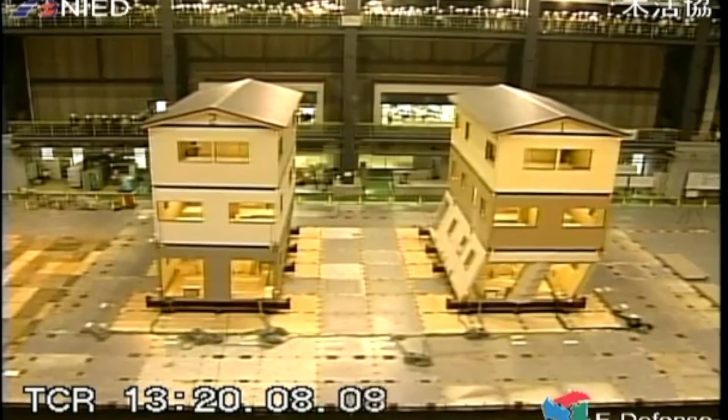So you can see from the video what happens in a soft story condition. The building with the soft story condition had a total collapse and it actually rolled over. The building that was retrofitted survived.

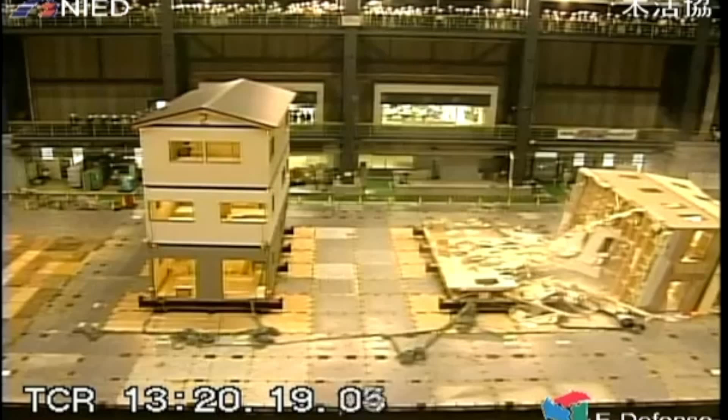The cities that have critical seismic zones, which includes Los Angeles, San Francisco, Oakland, and Sacramento, recognized this as a risk and collaborated together to develop the soft story ordinance. They embarked on creating a seismic rating system and an ordinance requiring building owners with this potential risk of collapse to retrofit their buildings.

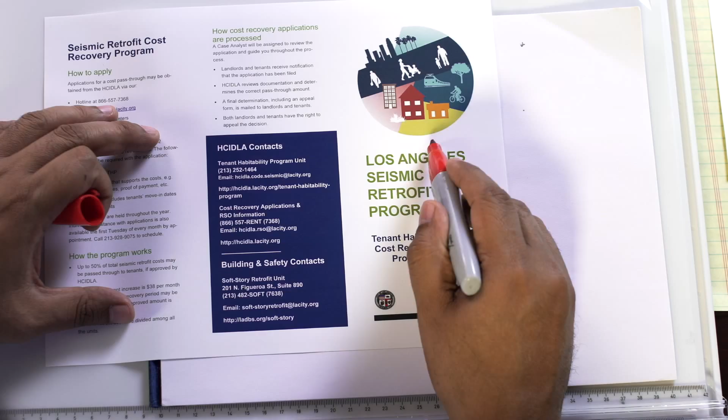It's a safety measure. The City of LA created this safety measure, called the LA Seismic Retrofit Program, the Los Angeles Seismic Retrofit Program. This handout, which is available, you'll see the link up on the screen, gives you the basic parameters and also informs tenants in buildings like this.

With over 15,000 buildings affected, it's a fairly drastic ordinance. The timeline for implementing the ordinance is approximately 7 years. Let's go over the timeline.

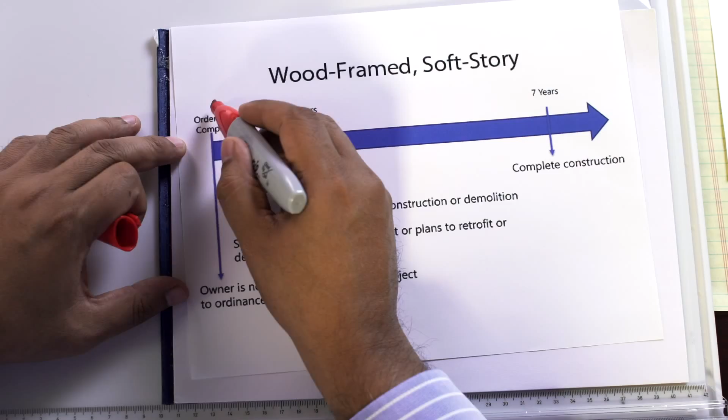The building owner has, from the date of the order to comply, which is when they get the notice, 7 years to comply with the ordinance. In the first 2 years, they have to submit proof that they have hired an engineer and that they're in the process of retrofitting their building.

The city's quite serious about this. The city will issue the order to comply, and building owners that don't comply will be subject to penalties. So it's a mandatory ordinance, and the tenants will be made aware. The order to comply will be issued, and it will affect the title of the property. So as a building owner, you've got to comply.

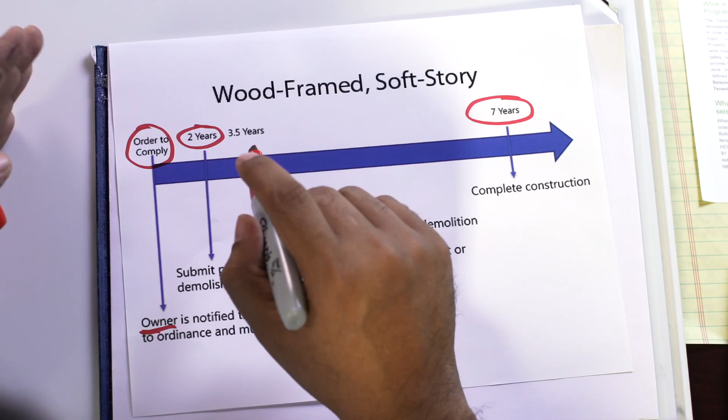The first thing we want to do is identify all the buildings that are at the greatest risk. This step, step number 1, is being done by the City of LA. I don't need to go into that with you. They are the ones going around identifying those buildings and then issuing orders to comply.

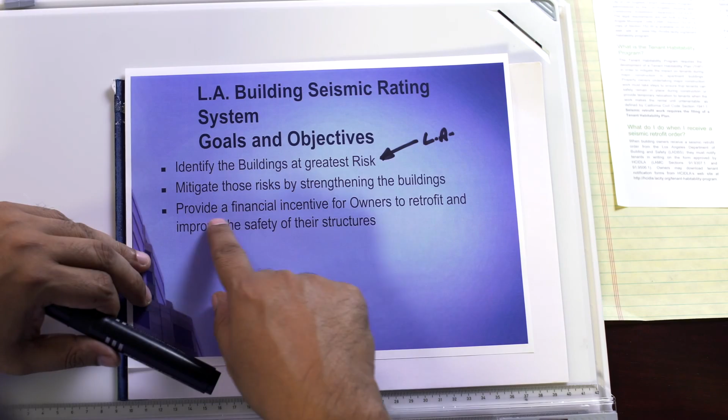When the owner gets the order, the owner then has to mitigate those risks by strengthening the buildings. The city is also trying to provide some financial incentives to building owners so they can help finance this or create tax benefits. That, again, is a separate topic, outside the scope of this presentation, but there are some financial incentives out there.

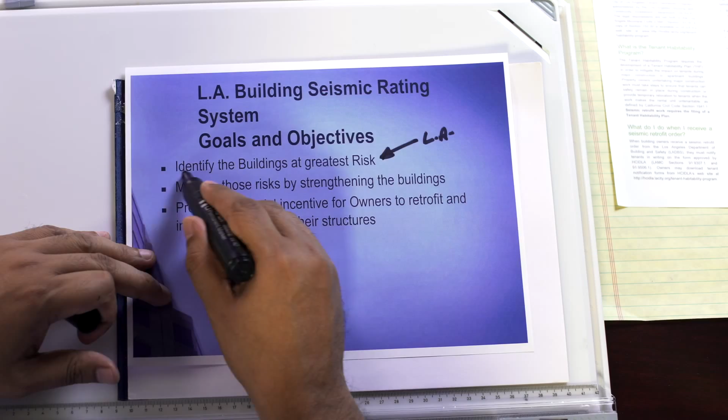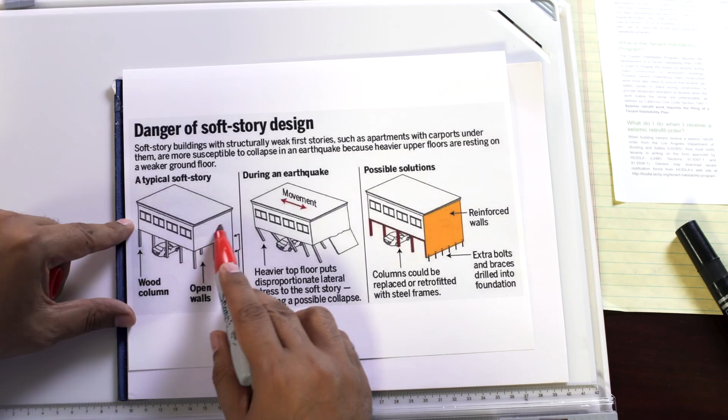On the left hand side, you can see the building which has a pretty robust second story with these weak columns. This is very, very common in Hollywood and Santa Monica. I'm sure many of you are living in these buildings. When you see this type of framework, that is potentially a soft story and a collapse hazard.

In a fairly moderate earthquake, that entire building will collapse. You can see that illustrated in the second portion of the figure, which shows that under lateral movement, that entire floor will come down. And obviously, if you have 2 or 3 or more stories up there, and we are, being Los Angeles, very densely populated, the risk is even higher.

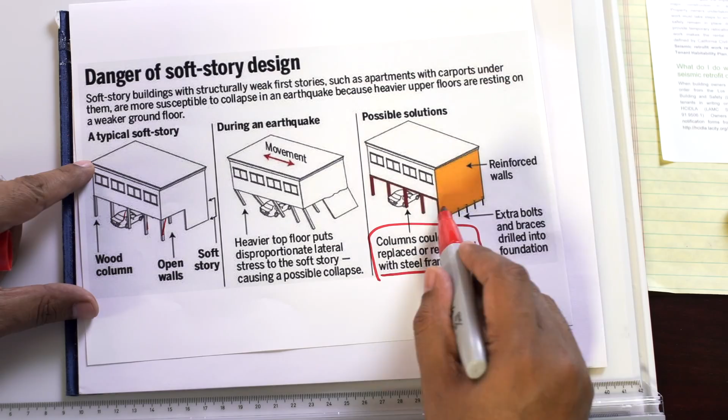So what do we do? Well, the solution focuses on using strengthened columns, either steel columns, moment frames, or possibly shear walls, to strengthen that lower floor so that it does not have a weak stiffness line, so that it doesn't collapse. So what we're doing is taking these existing columns and either replacing them or upgrading them. So I drew this sketch for you before.

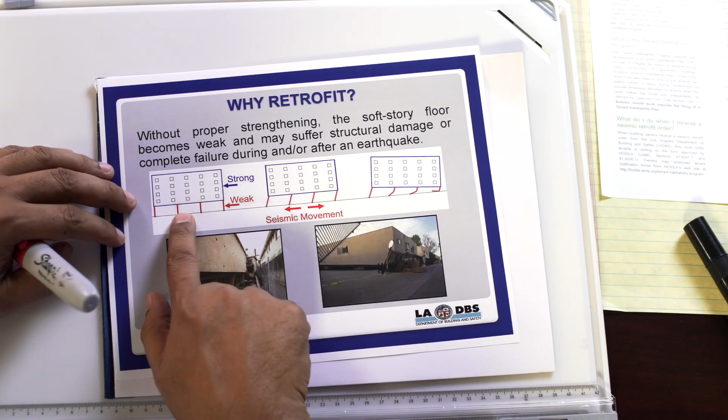We have to strengthen the weak column line. So what we're going to do is come in with our solutions. Here are the options: one option is retrofit options.

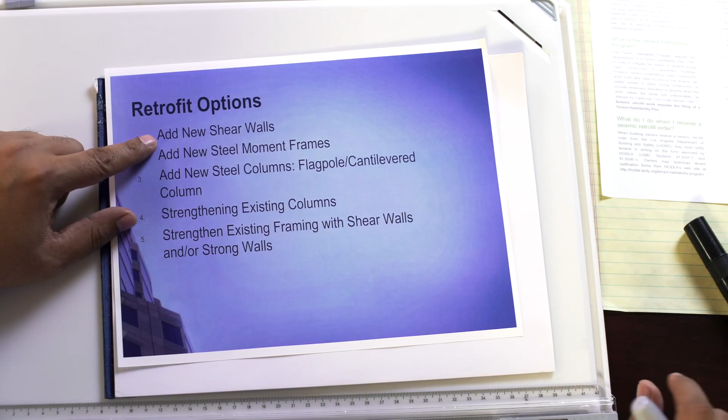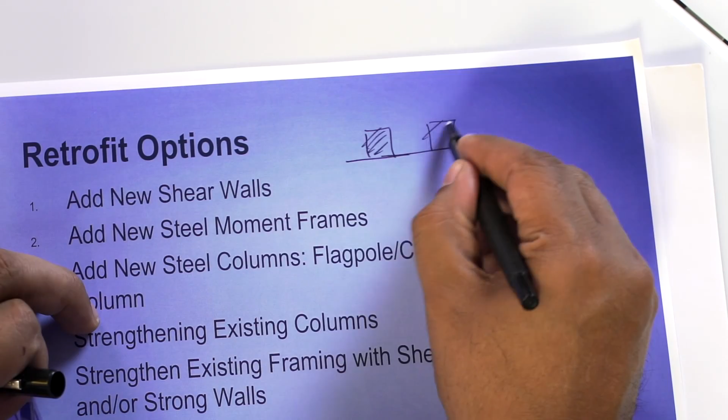We can add new shear walls. I'll explain what that is. A shear wall is essentially a wall that comes in to supplement the stiffness on the ground floor, and you have your upper floors up here, and that creates a higher stiffness. It's basically strengthening using a wall.

Another idea is to use a steel moment frame, and we'll talk about that in a second. We can also add new steel columns, which we call flagpole or cantilevered columns. I'll go into that in a minute.

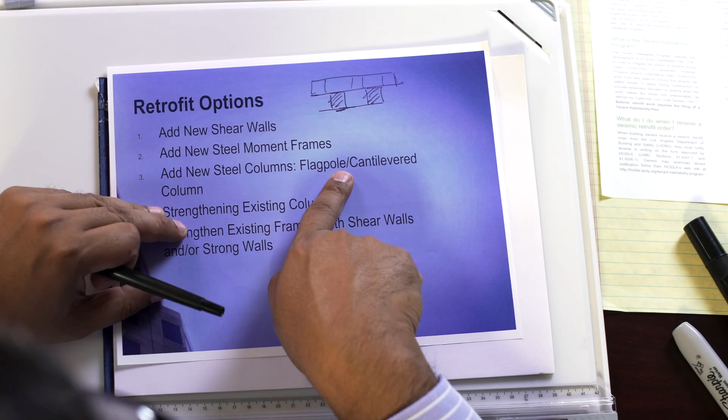We can also strengthen the existing columns. If it's already steel, maybe we don't need to replace the existing steel, maybe we can strengthen it, maybe box it up and create a tube. I'll explain that also. We can strengthen the existing framing with shear walls and or strong walls.

So here you have 5 options, and it depends upon your structure, it depends upon what the logistics are, it depends on how many floors there are. The first step is to examine the structure, do a feasibility study, and try to see which one of these is the most cost effective.

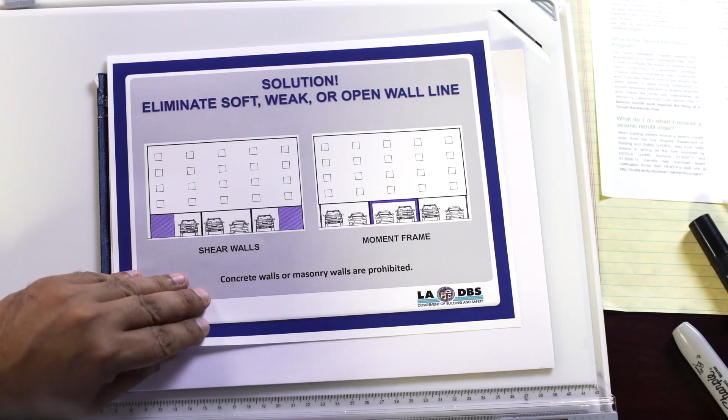For example, let's look at a hypothetical case: 1, 2, 3, 4 stories over my soft story. In this example, two solutions: one is to put in 2 shear walls, and the other is to put in a single moment frame. Now, what's the problem with the first one?

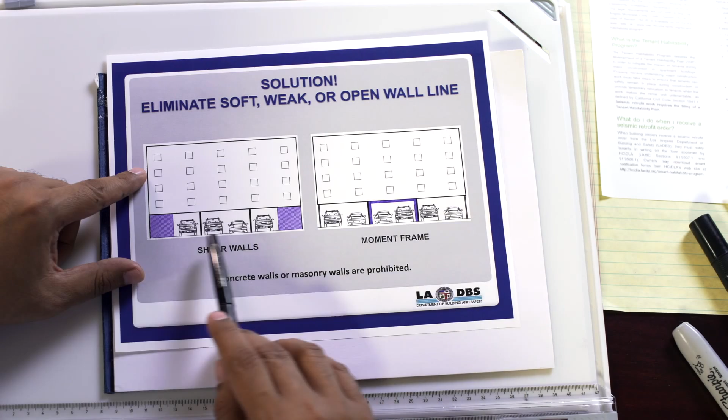The first one is most likely going to be cheaper, but the problem is, as you can see, you lose parking. That's the problem with shear walls—they take up the parking, and no tenant likes to lose their parking.

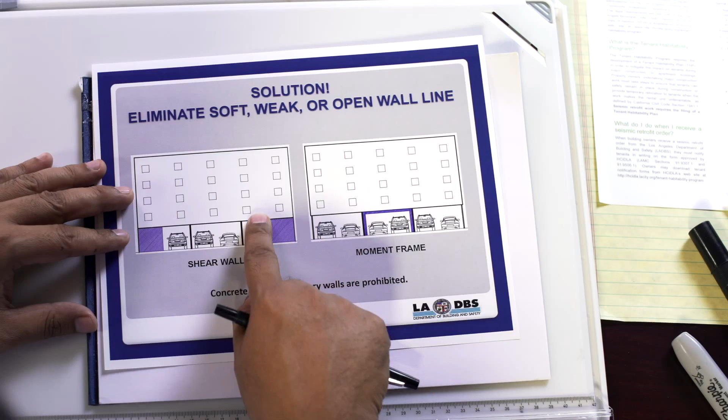The second option is a good option, but I want to go into the details of putting a moment frame in. It's a lot more involved than just what this drawing shows. A steel moment frame is a combination of columns and horizontal beams that are rigidly connected at the joints.

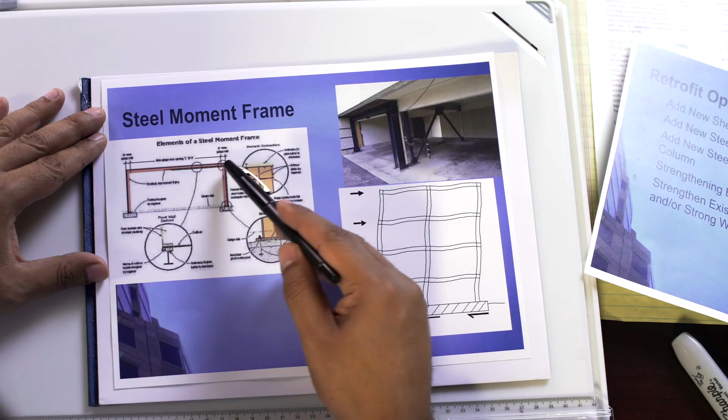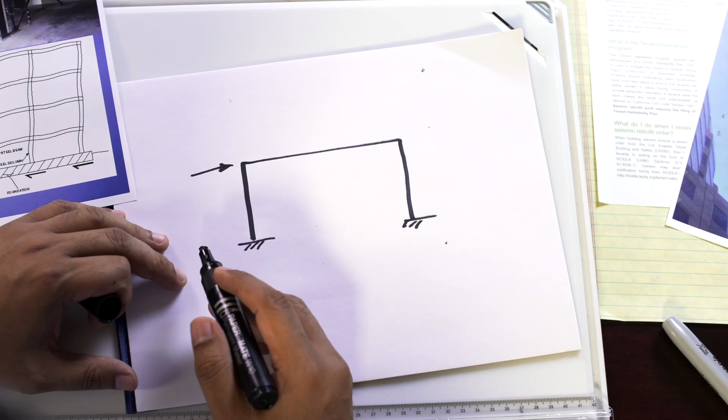What do we mean by rigidly connected? Let me try to explain that with a simple sketch. If I have a frame made of steel, and I apply a load on the side, if these are rigid connections, which they're supposed to be, and everything here is made out of steel, when this deflects, it's going to deflect like this.

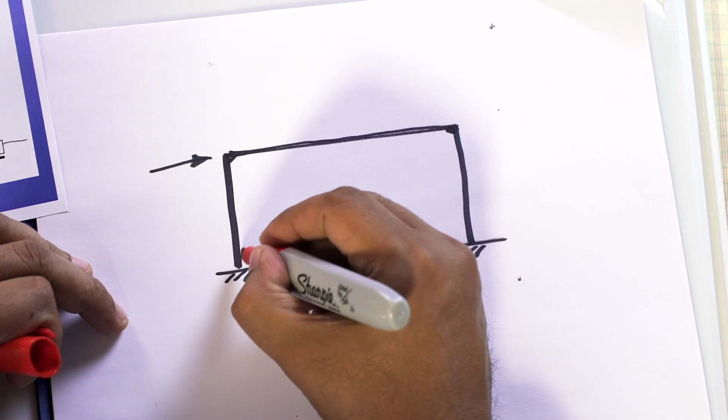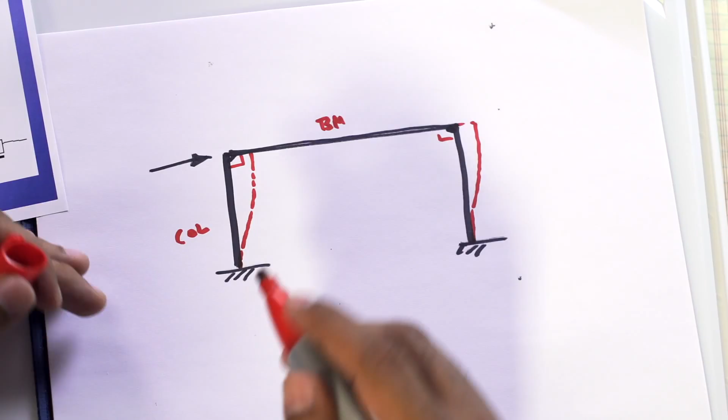It's going to deflect in a way that the angle between the column—here's my beam—that angle between the beam and the column always remains at 90 degrees. In other words, there is no rotation.

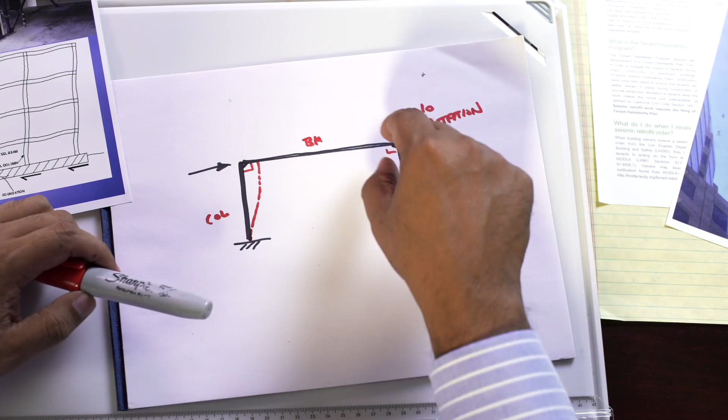The fact that there is no rotation means that there's a very high bending stress occurring on those beam-column joints. As opposed to a hinged connection, if we allow rotation, then what happens?

The frame would deflect like this. Then it's no longer a frame—well, it's still a frame, but it's pinned. If it's pinned, then it will deflect like this because this is allowed to rotate.

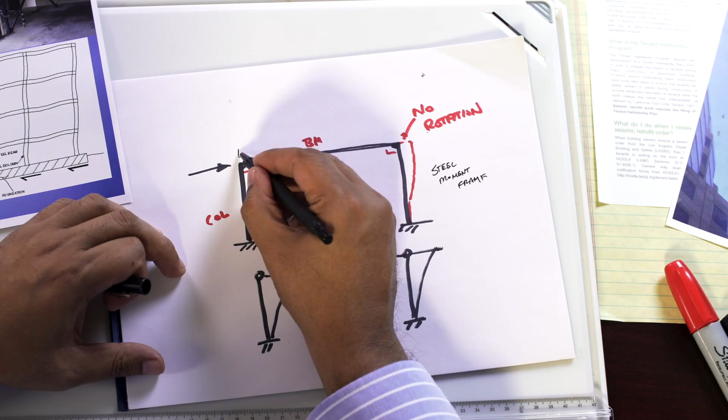What's the difference between the two? This one, which is a steel moment frame, will have a shorter deflection—it's much more stiff. This one, which does not have a moment frame, this is a cantilevered column, will have a higher deflection.

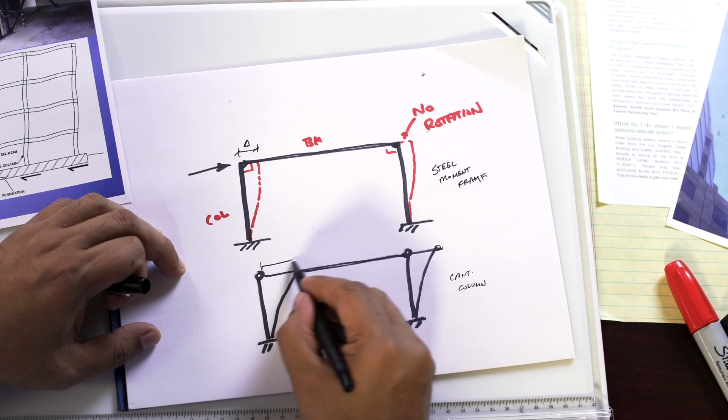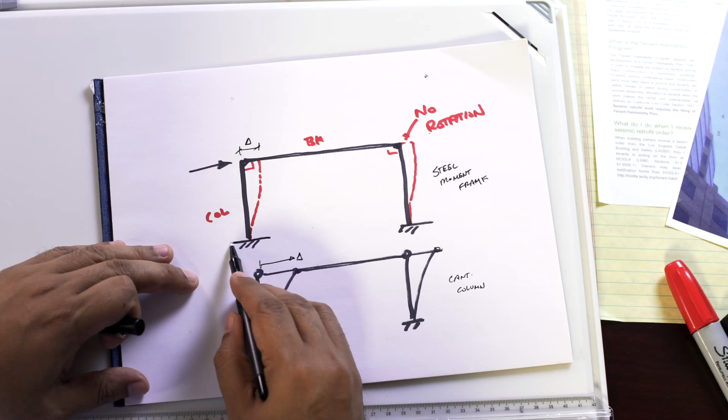So it all depends on whether or not the building can tolerate the higher deflections. What's the difference between the two? The steel moment frame requires a grade beam that has to be dug inside.

There's a whole concrete beam that has to go in there, and this connection is a very, very detailed connection. It requires welding, it requires bolting. It's more expensive, but it's the best solution, I will say that.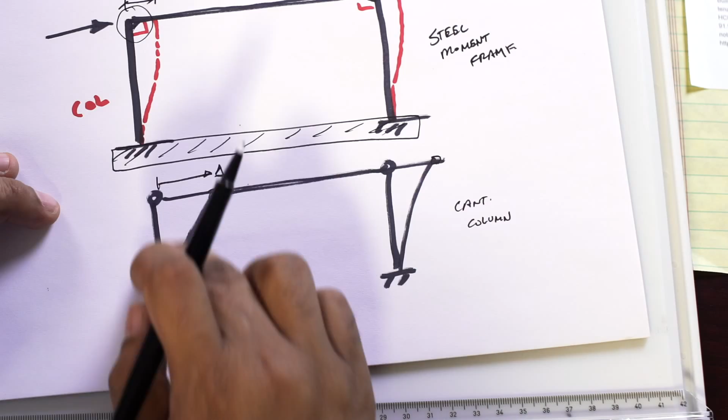From an engineering standpoint, you can't beat a steel moment frame, but it is also more expensive. The cantilevered column, shown on the bottom, can be designed with a footing. It's a cheaper solution, in my opinion, easier to install, but it has less stiffness.

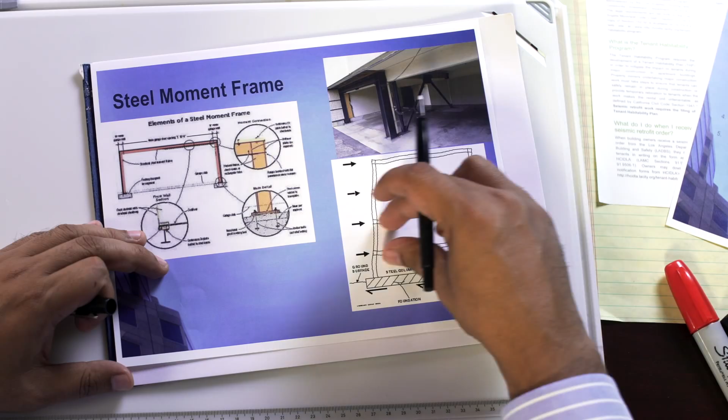Now, the question is, in terms of stiffness, you have to look at what do you need. If it's only a 1-story building, we may not need a steel moment frame. Maybe we can do a cantilevered column. What I like to use is what's called a structural tube.

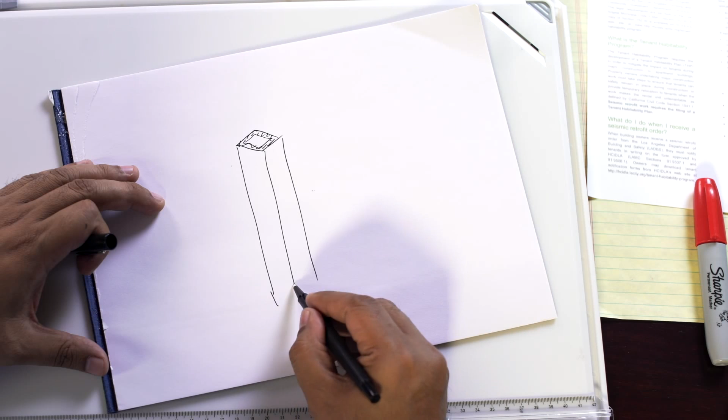A structural tube is exactly what it says: a steel tube which is then connected down at the base with a steel plate with bolts that go into a concrete foundation. Why do I like this solution?

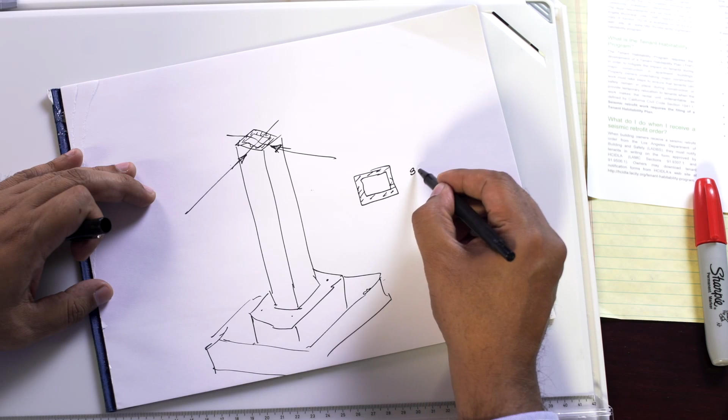Because the structural tube can take loads in both directions. It has symmetry, so when I do a design, and let's say I recommend an 8-inch by 8-inch by half-inch thick structural tube, I like that solution because I get strength in two directions.

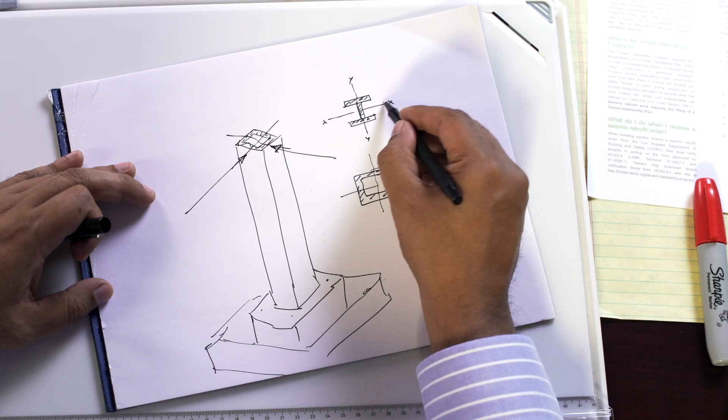As opposed to doing an I-beam, a lot of people use the I-beam. The I-beam is strong about one axis and weak about the other. In my little sketch here, it's very strong about one axis, the x-axis, but very weak about the y-axis. It does not give you the same strength in both directions.

So there are multiple options, and the same thing applies when we look at these other choices. Let's look at the wood shear wall.

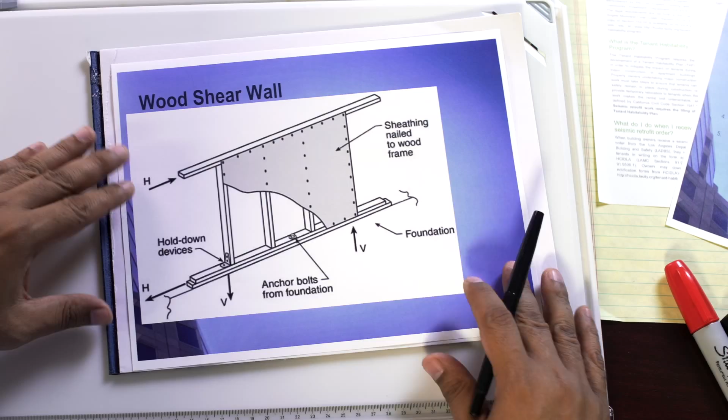A wood shear wall is essentially a system of studs with a top plate and a bottom plate with plywood sheathing. What does a wood shear wall do? When you put the plywood sheathing on and apply force, this sheathing, which sandwiches to the stud, prevents the shear wall from deflecting.

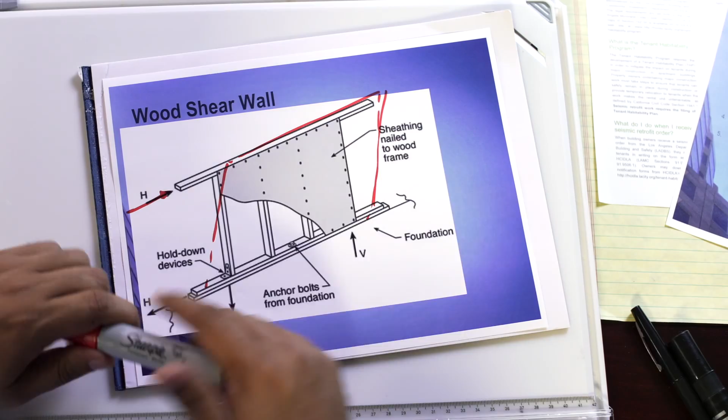It's as simple as that. If you didn't have the sheathing and just had the studs, the wall is less stable. You apply the load, the studs will just bend. But when you put the sheathing on, it ties it all together, creates a panel. And that's what a shear wall is.

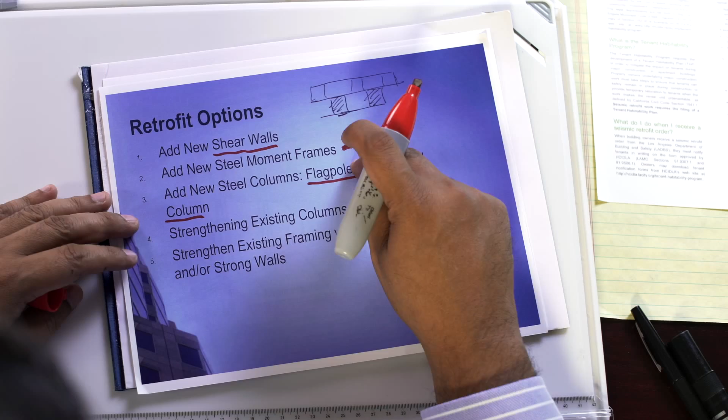What about the fourth option, strengthening existing columns? What do I mean by that? Let's talk about that for a minute. Let's say your building has some steel columns already in place. Usually those columns will be in the form of I-beams. They'll look like this.

So maybe when we look at your building, we find that the steel columns are already there, but they're not big enough. Well, we can come in and weld new plates on the side of that steel column. We can also weld a new plate on the stronger side, and box that in to create a new column, which is much stronger than the original column.

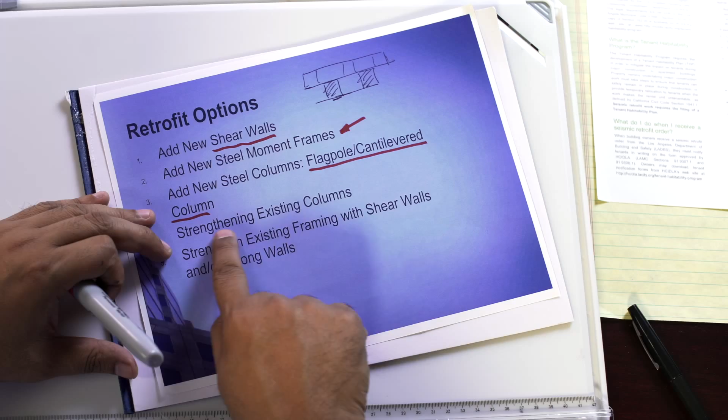So it's more than one option, and maybe strengthening the existing column works. Again, there's no one solution, there are multiple solutions. They apply to different cases, and the job of the engineer is to give you those choices and help you decide as an owner which one you can afford.

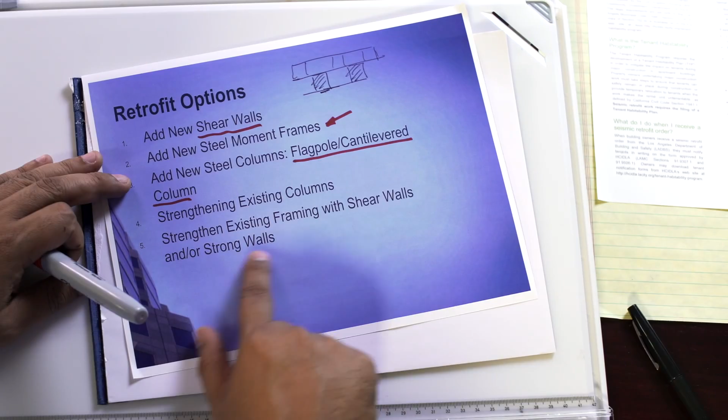The other option on the list is the strong wall. So we can also use adding a strong wall. What is a strong wall? A strong wall is essentially a shear wall, but it's a proprietary shear wall developed by a specific manufacturer, which has a super high strength and it's not as long.

In other words, this distance here can be as short as 2 feet. It can be as short as 18 inches. I think they even go down to 12 inches. So what does that mean? It means that if you have 12 inches to work with, you could possibly put in a strong wall.

But as you saw with some of the slides we looked at, 12 inches may sound like a lot. It's about a foot. You may not have a foot. In some cases, some of these columns are only 6 inches wide.

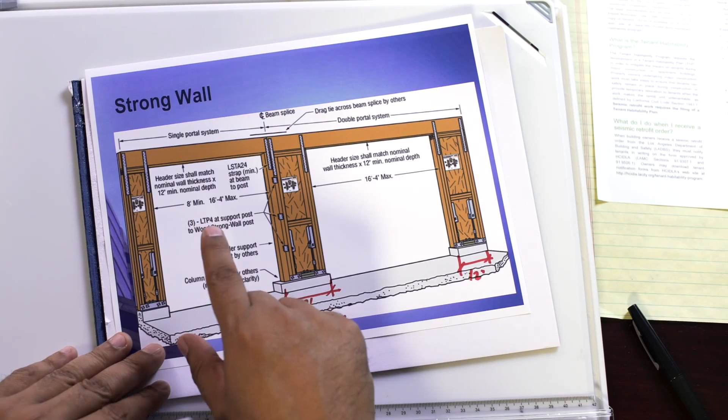If I put in a 1-foot strong wall, what have I done to my parking? I've lost my parking, and parking is a sensitive matter. So strong walls can be used in certain instances where if you have the length and you can do it, then by all means it should be considered.

But if you don't have the length, then you have to go with the steel moment frame or the cantilevered column. So here's the question I get all the time. Every owner comes to me and says, give me a price, how much does it cost? I get this question all the time.

And my answer is, it depends. I can't give you a cost. We first have to do some sort of analysis, a step one. I emphasize that because my role in this process is as an engineer. I'm not a contractor - I mean, I am a licensed contractor, but I don't practice construction. My job as an engineer is to evaluate the building and give you your best option.

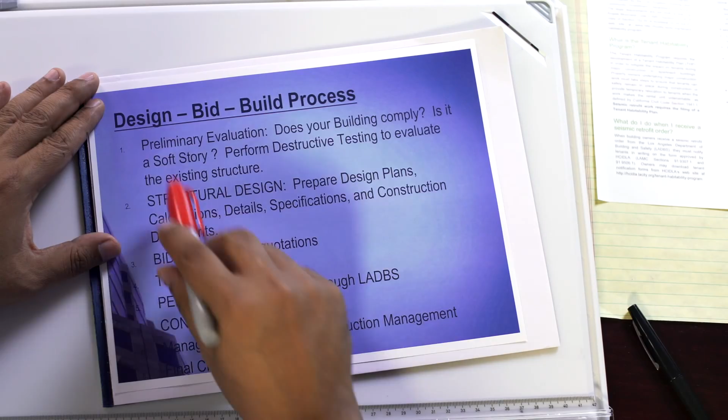Then you can go and get the contractor of your choice, or I can recommend somebody to you who can give you the price. There are two ways that you can proceed. The first way is what's called the Design-Bid-Build process. This is the traditional way. Step one, we do a preliminary evaluation.

Does your building comply? Maybe your building already complies. Just because they gave you the notice, it doesn't mean that you necessarily have to do something, because it just means they're letting you know that you need to examine your building. Is it a soft story? We have to do some destructive testing - come out to the building, cut some stucco, see whether the columns are steel or wood. So we have to do some evaluation unless we have a set of drawings.

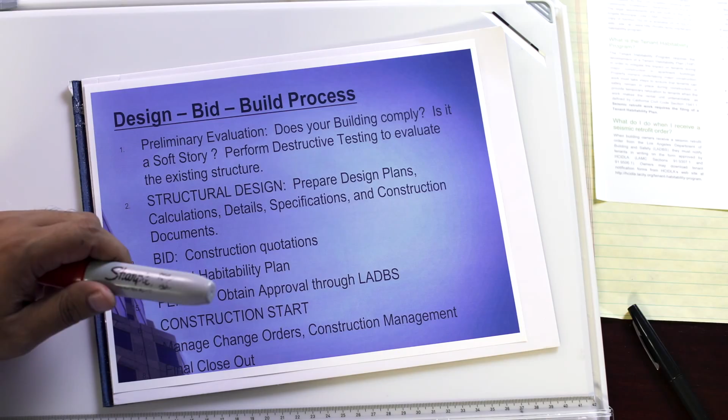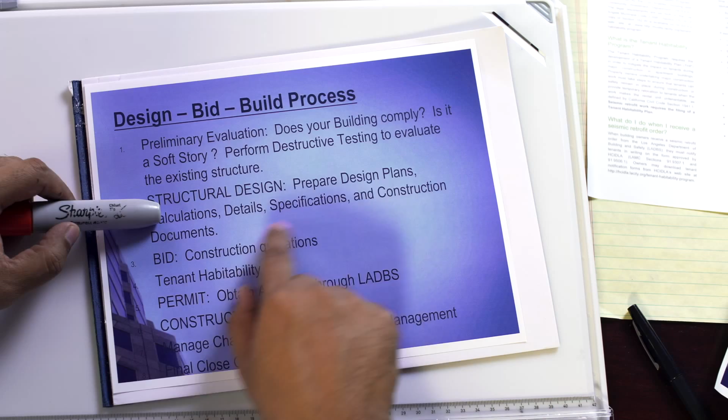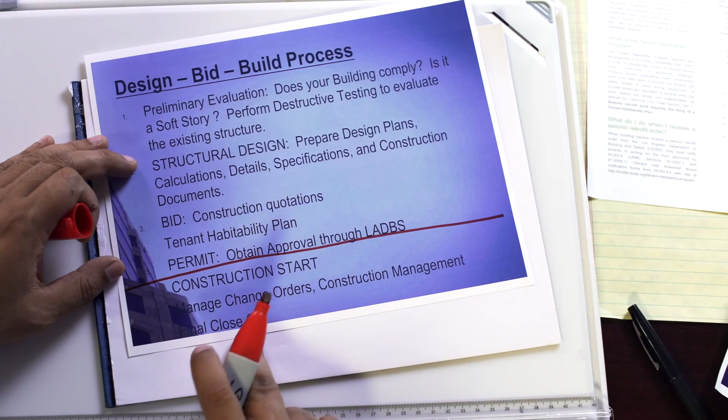Then we have to do some calculations. We have to see, going back to the 5 options, which one of the 5 options is going to work? Is there a 6th and a 7th option? So we have to do some engineering and evaluate. Then, after we do the evaluation, you can come up with a cost, and then you can develop your tenant habitability plan, pull your permit - which we will help you with. At this point is where you retain your contractor and start with steps 6, 7, and 8, which is to engage the contractor and let them go do what they do, which is to build it.

This is the preferable option - this is what I recommend, option number 1. Option number 2 is another choice. Some people don't want to take the steps of doing the evaluation, the structural design.

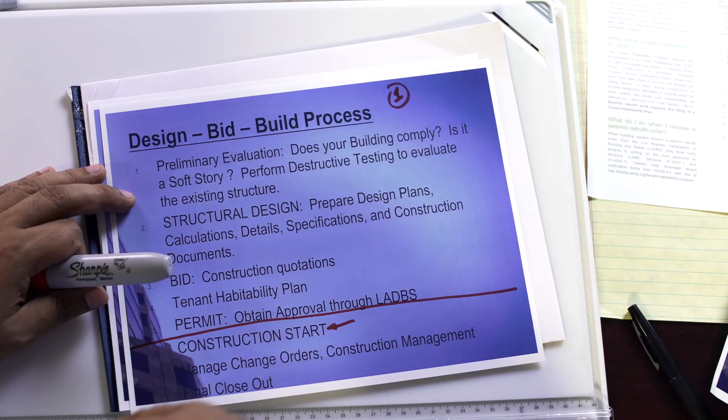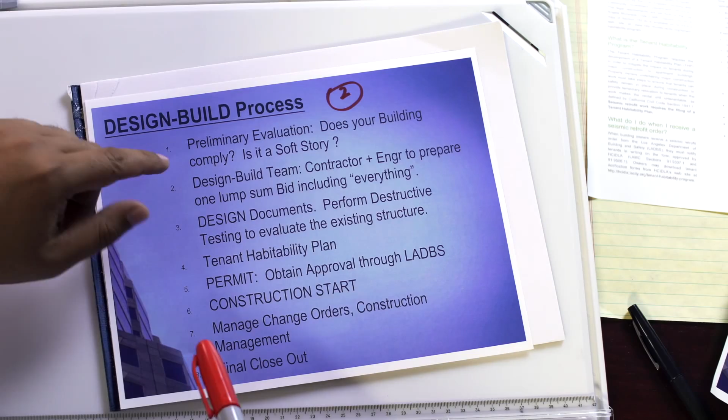Some people want a price, and they want it done now. So there are some companies we call design-build companies - this is called the design-build process. They will do some sort of preliminary evaluation, but now the contractor steps in at the very beginning, and the contractor will bring in an engineer to prepare a design. So the initial steps of evaluation and looking at options is eliminated for the most part, and the design builder, the contractor, will then just come to you with one option, one price, and say, that's our price, that's our solution. And they will go straight to design documents.

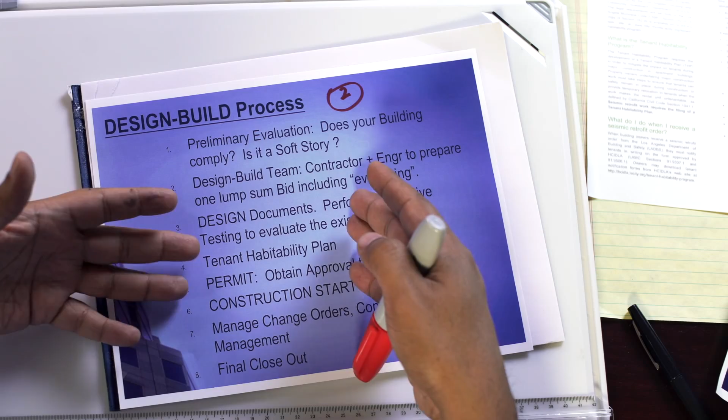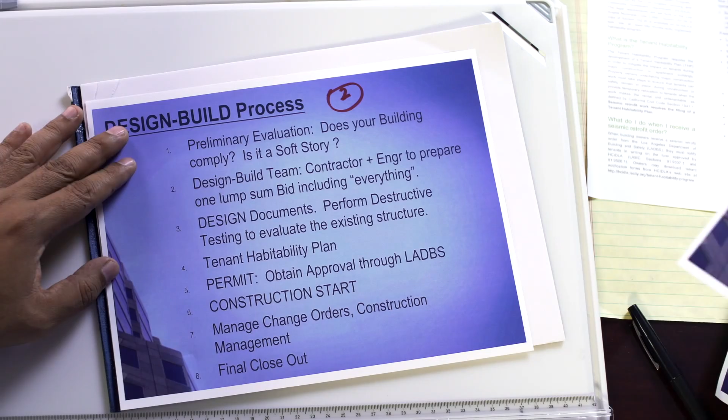It's definitely a faster procedure, but my advice to you as owners and tenants is that you are then disengaged from the different choices. Sometimes this will work - I'm not saying it's a bad option. We've done it, we work with contractors, but I just want you to be aware of the 2 choices, because there are a lot of people running around in town who are offering only the 2nd option. I want you to know that there is a 1st option. And I would highly recommend, especially for those of you that have more than 20 units, get a construction manager. Don't try to do this yourself.